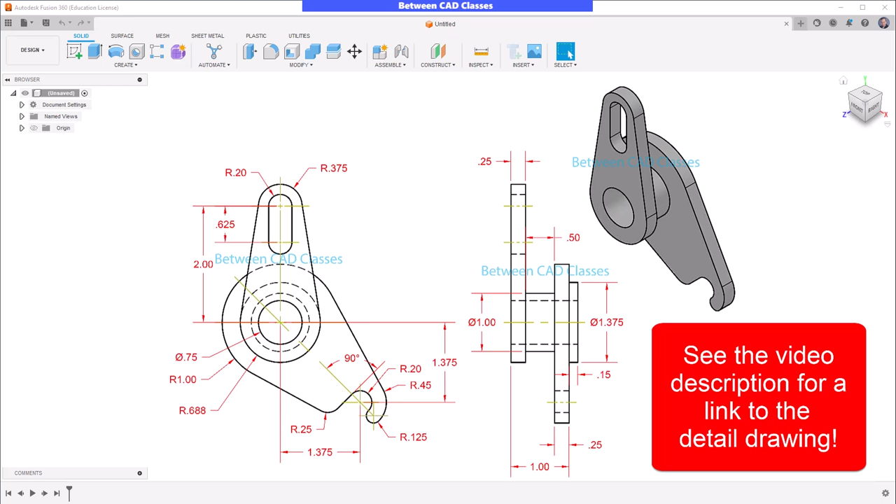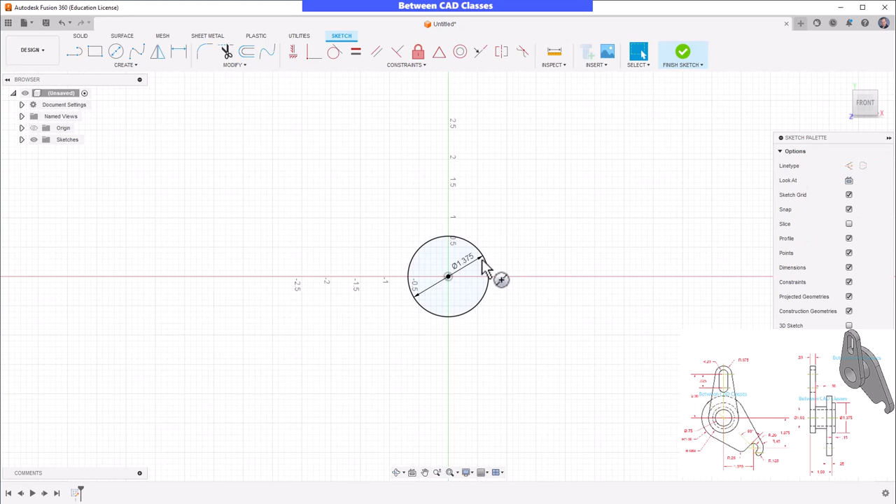To begin with then, we're going to start with the diameter of 1.375 extrusion that is going to be extruded 0.15. So here in Fusion 360, I'll begin with a new sketch, and then I'm going to sketch on the front plane here. I'm going to place everything around the origin, so I'll begin with a center diameter circle, snap to the center point there, and then put in the diameter of 1.375 and enter. I'll finish the sketch, and then extrude that the distance of 0.15, and enter.

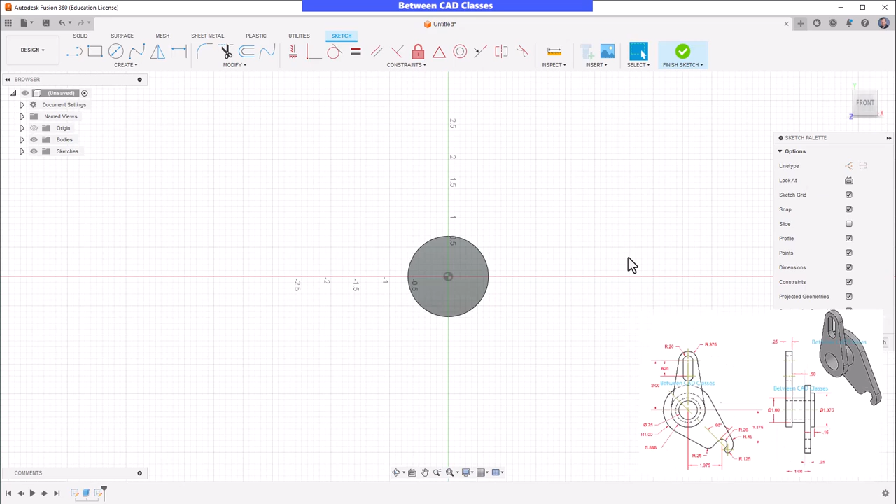Next I'll create the next feature, and it will be on this front surface here. So I'll begin with my create sketch and I'll click on that surface. Let's take a closer look at the detailed drawing here. I can see that I'm going to have a radius of 1 circle around the same center, and then I will have a radius of 0.45 circle that is at 1.375 down from the other, and 1.375 to the right as well. So once I draw those two circles, then I can connect them with some tangent lines. Then I can tackle the cutout. So let's take a look at drawing those features first.

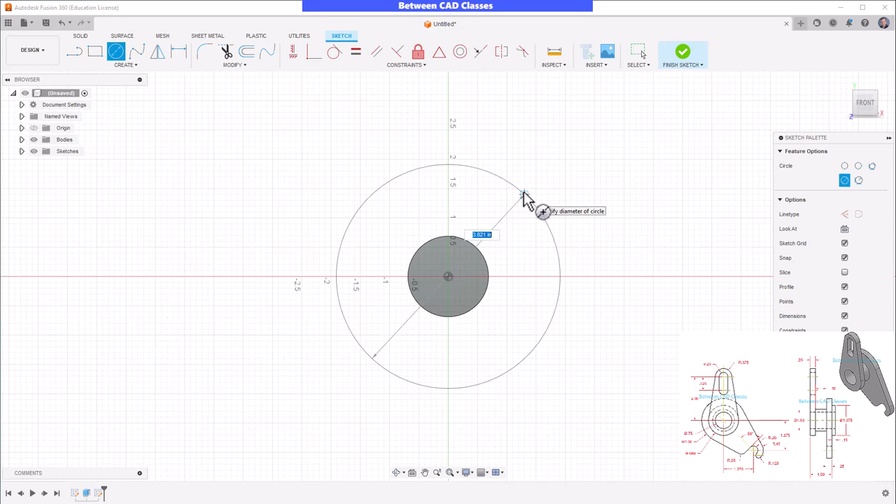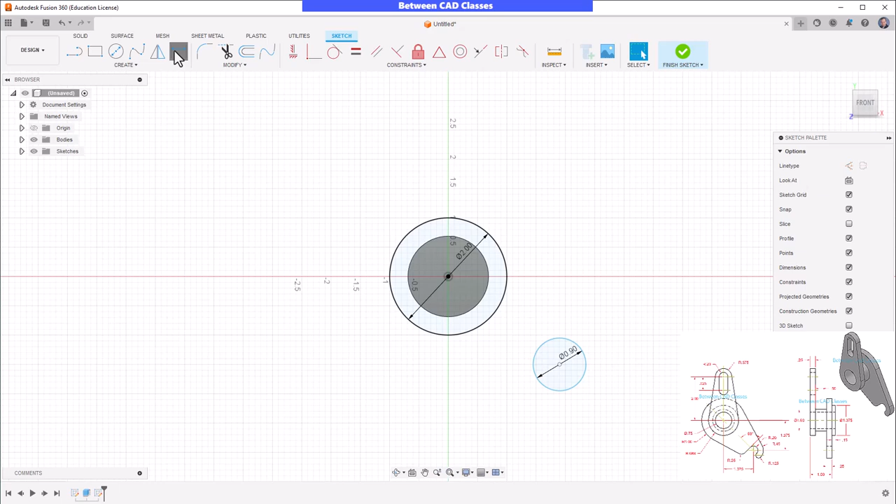I'll start with the center diameter circle, snap to the same origin here. We're told it's a radius of 1, so that'll be a diameter of 2. Then I will have my second circle, and I'm just going to arbitrarily place it for now out here to the bottom right. And then it's going to have a diameter of 0.9, since we're given the radius of 0.45. Then I can go ahead and add in some dimensions to place this. So I'll dimension from the center of each of these circles, and then I'll click to place a horizontal dimension of 1.375. And then I'll do the same thing vertically. So another dimension from center to center, click to place it, and 1.375 again.

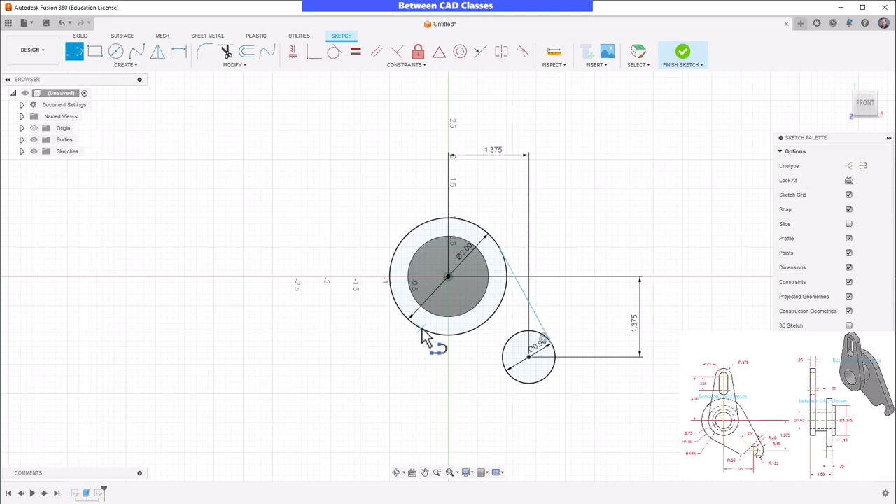Now that those are located properly, I'll go ahead and draw some tangent lines. So I'll start my line tool, and I'm just going to arbitrarily pick the first point, and then I'm going to look for the tangent constraint when I get to the second circle. And then I'll come back and add my tangent constraint on the other one. So I'll do the same sort of thing here. Pick a point, and then look for my tangent constraint there. I can still see my geometry is blue, it's under constrained, so I'm going to come back and add some tangent constraints between the line and the circle there, and the line and the circle there.

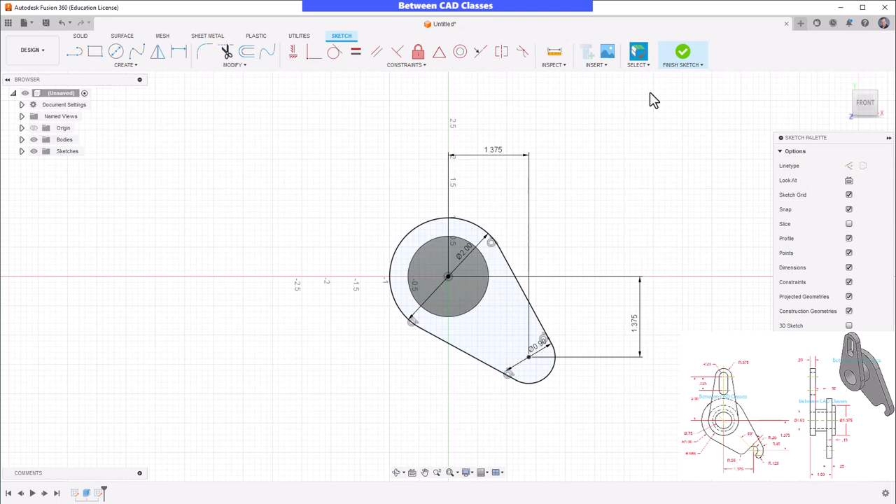Now at this point, I can leave it as it is and extrude it as 3 separate features, or I can trim them. I'll go ahead and trim the inside of these circles. And I get a little message that some constraints were removed, but we can see that it is still fully constrained and should be okay. I'm going to go ahead and finish the sketch, and then I will extrude this the depth of 0.25. So I'll select my shapes here, both of them in this case, 0.25, and enter. Now the part does have a hole cutting through each of these. I'm not going to add them to the individual sketches. I'm going to come back and add one hole at the very end.

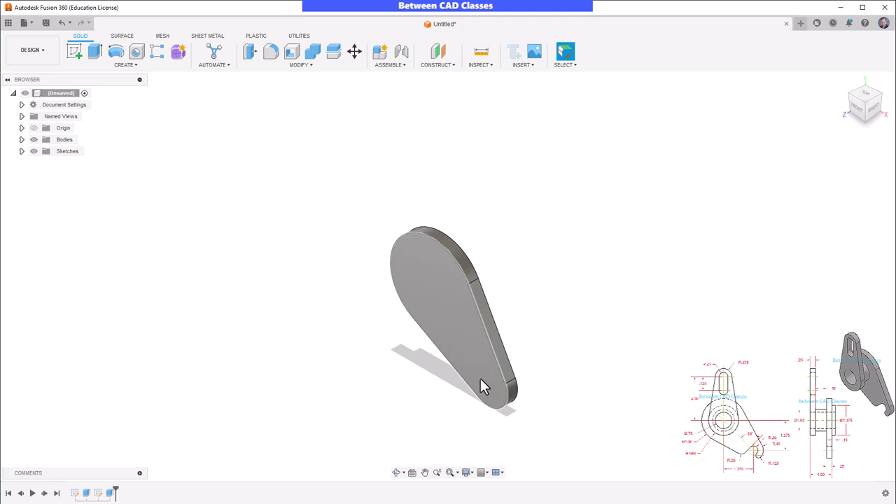Next I want to tackle this little cutout. Now I could have done that as part of the original sketch, but I'm going to go ahead and do it as its own feature. That would give me some flexibility if, for example, I wanted to get rid of that cutout later. So as we look at the detail drawing here, there's a lot of detail here. We've got a radius 0.2 arc at that center point of the other arc, and then we have another one with a radius of 0.125 along that same vector from the center. And we can see we have the radius 0.25 round as well.

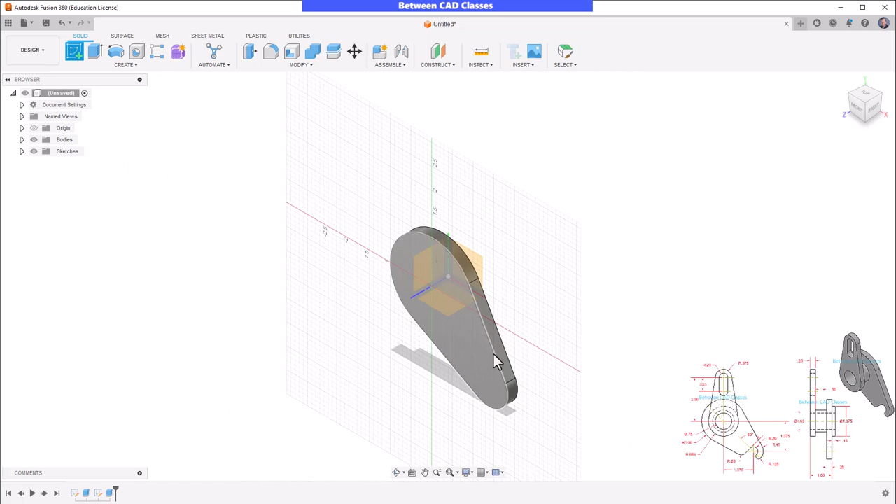So back in Fusion, I'm going to go ahead and sketch on the front of this shape. I'm going to start by creating a concentric circle here. So I'll snap to the center point and give it a diameter of 0.4, since we were told it has a radius of 0.2.

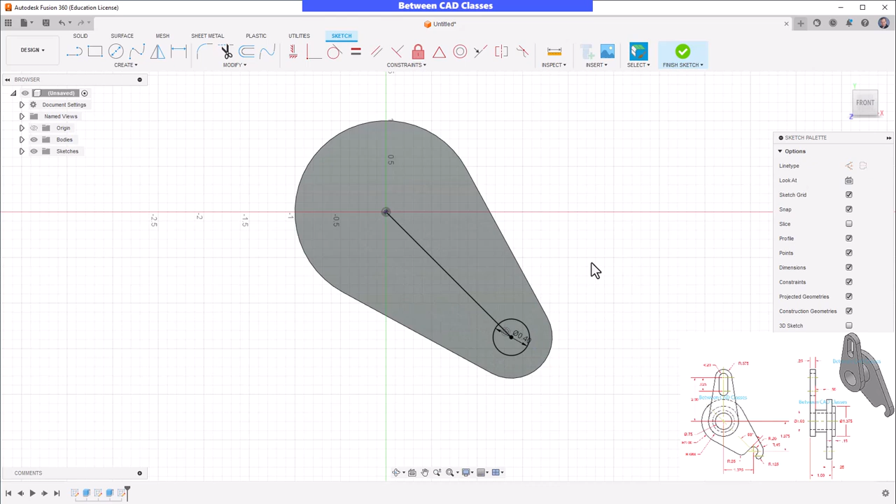Next I'm going to create a construction line between the centers of these arcs. So I'll just simply draw a line from center to center here, and then I'll escape out of that. Then I will select the line, right click, and convert it into a construction line.

Next I'm going to extend this construction line. So I'm going to click the modify drop down and choose extend. I'm extending this because this will allow me to locate the next circular shape over here. So I'll extend the line. Looks like I get a message that some constraints were removed. I'll investigate that more in just a moment. I'll go ahead and extend that one more time here, and then I'll press escape to get out of that.

I'm going to click and drag on this line, and I can see that it lost its coincident constraint to that center point. So I'm going to come back and add that back in. So coincident, center point, and line, and now we can see that's back to where it needs to go.

Next, I'm going to draw a circle in here and then make it tangent to this inside circle and the outside arc. So I'll select the center diameter circle. I'm going to snap somewhere on this construction line here, and then I'll just draw it of any size. Then I will escape out of that and come back with my tangent constraints. Make a tangent between the circle and the circle that I just drew, the circle I just drew, and this outside shape. And we can now see that it's fully constrained.

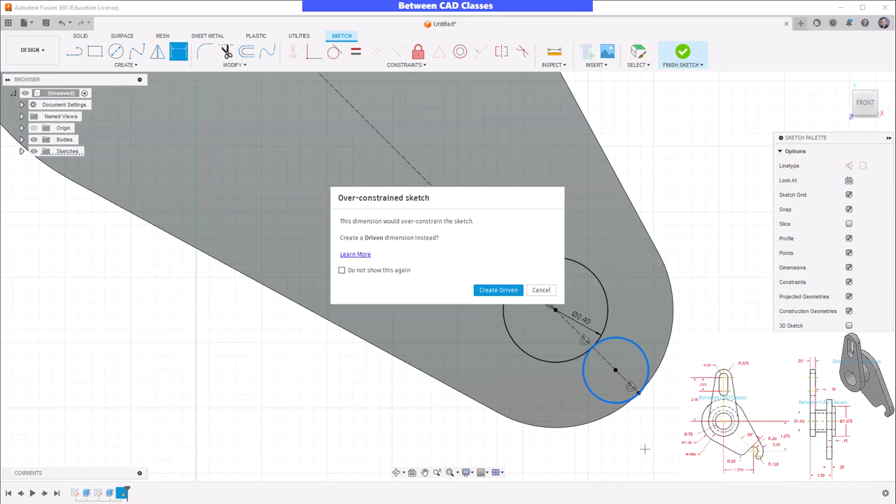We were told it has a radius of 0.125. We didn't have to add that dimension in. But if I wanted to double check it, I can add in a dimension here. And I can right click and switch it to radius and click to place it. That would over constrain my drawing, but I can go ahead and create a driven dimension just so that I can see a reporting value and feel comfortable knowing that it's the correct size.

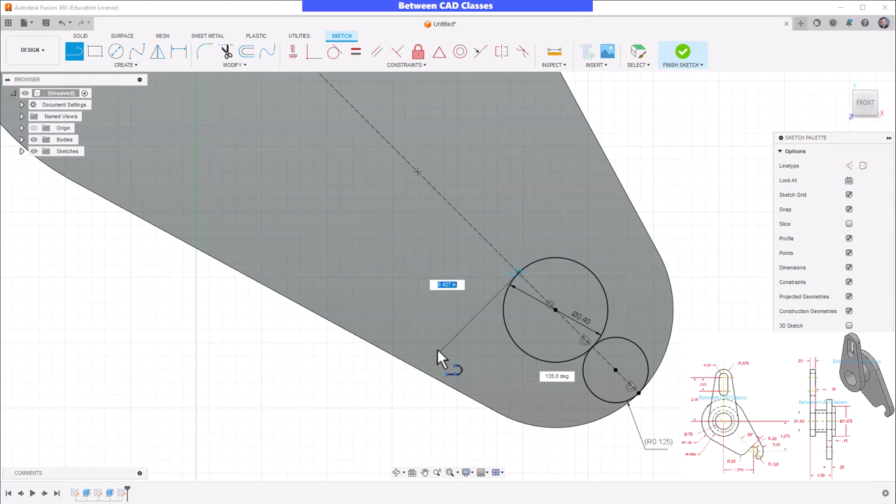Next, I'm going to draw the other line over here for the cutout, so I'll choose my line command. I'll snap to the intersection here, and then I will snap to perpendicular/tangent of that circle, and then I'll just draw it to the edge here. I now have everything I need for my cutout. I could go ahead and leave it just as it is and cut out these two shapes. In fact, that's what I'm going to do. I'm afraid if I do some trimming, I might lose some constraints, so I think it'll be easier to just accept it as it is.

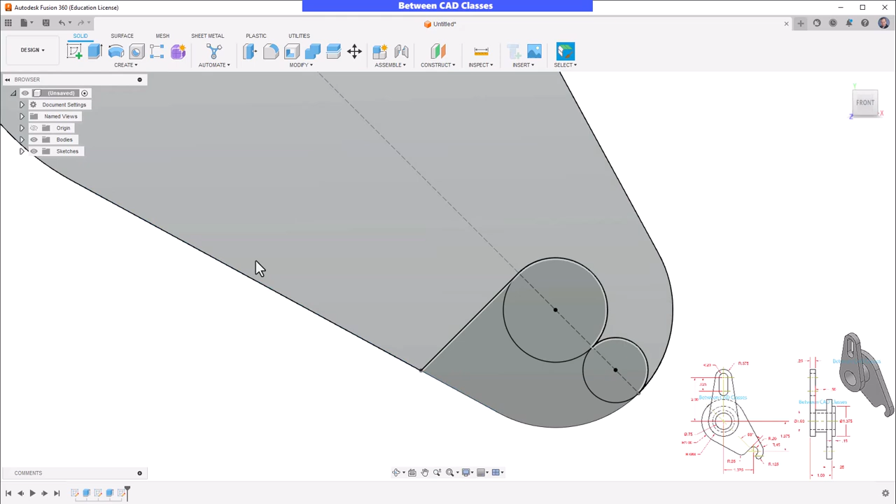So I'll finish my sketch. I will choose my extrude. I'll pick the big circle here, and then the shape here. Then I can drag it into the part, and we can see it's going to be a cut. So instead of distance, I'm going to go through all, and then click OK. Then finally I can add a fillet with a radius of 0.25 here. So I'll use my fillet command, I'll select the edge, 0.25, and enter.

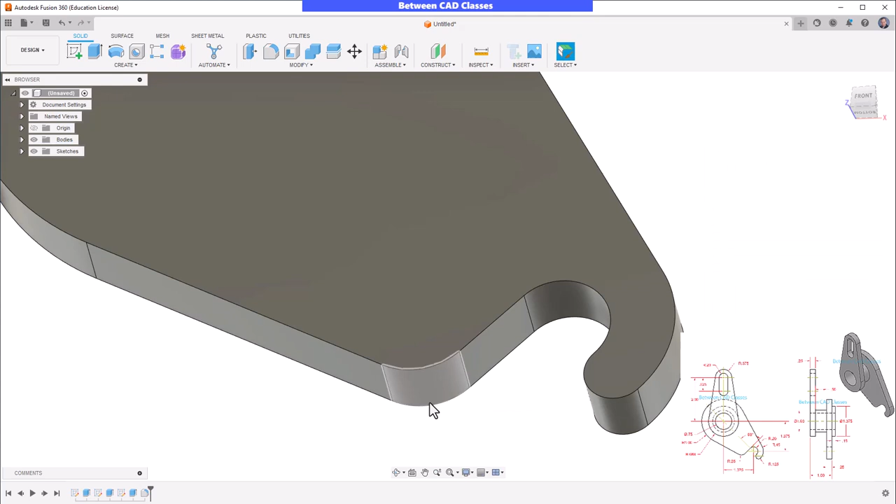So once again, that was one way I could have done this. I could have put it all in one sketch, but one of the reasons why I like this is it gives me some more flexibility. If I want to come in and get rid of those objects, I can right click and delete them and they are gone, as opposed to having to go in and edit the original sketch.

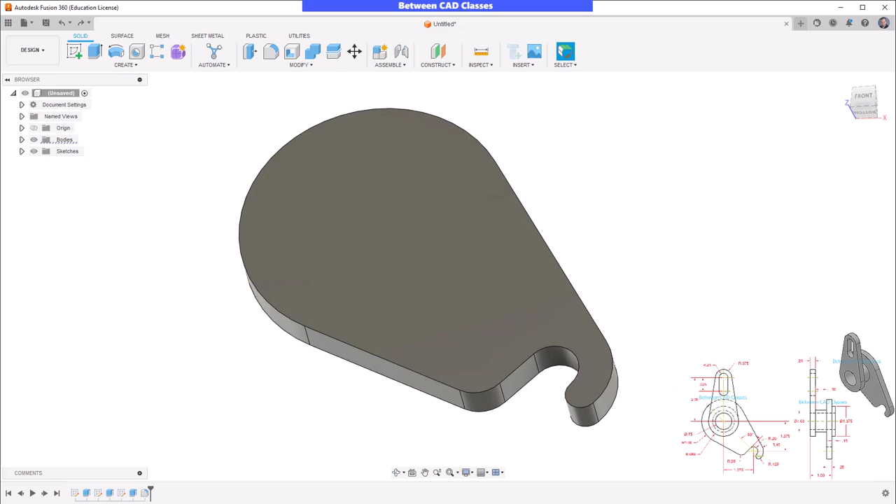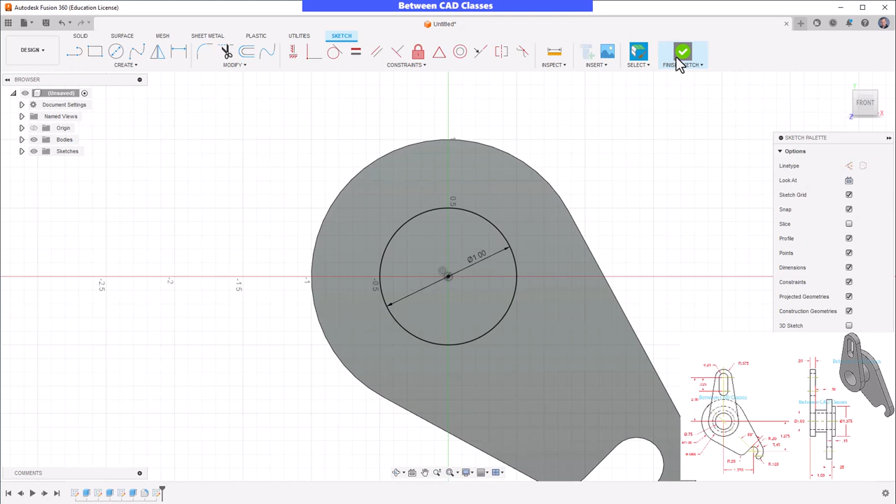Let's take a look at the print again, and next we have a diameter 1-inch circle that is going to be extruded up 0.5. I'll do another sketch on the top of this plane, and then I'll draw in my circle with a diameter of 1, finish that, and then extrude it 0.5.

Then one last shape is going to be put right on top of this circle, so I'll go ahead and sketch on it. As we take a look at our print again, we can see that the main shape is going to have a radius of 0.688 on the bottom, and then it's going to come up 2 inches, and then we'll have a radius of 0.375 up top. So I'm going to begin by creating that, and then I'll come back in and add the slotted cutout later.

So I'll go ahead and draw a circle at this same origin point. For the diameter value, I don't have that offhand. I have the radius value. I could do the math myself, but let's have Fusion do the math for us. I'm going to put in 0.688 times 2 and enter that in. So that's always nice to have Fusion do the math for you and make sure that you don't make a mistake in transferring what you might have calculated.

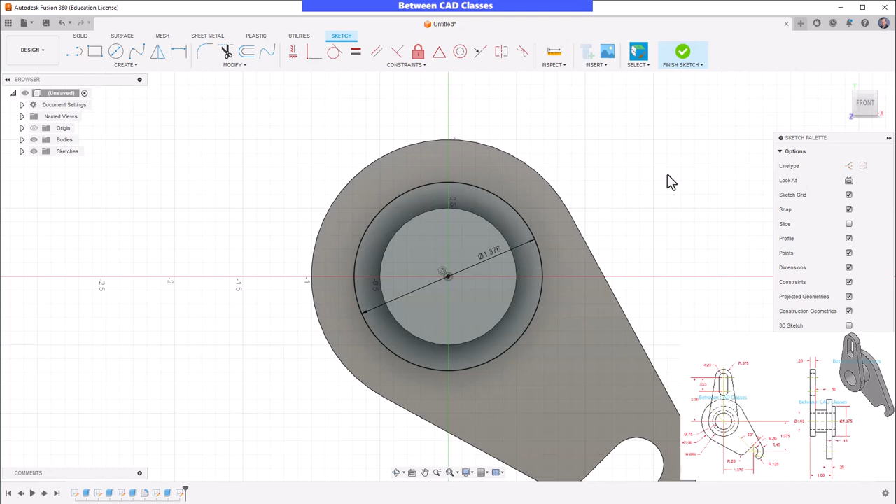Then I am going to add another circle directly up above that one, this one with a radius of 0.375. Again, I could put in the diameter as 0.375 times 2, and that will calculate that to be 3/4 of an inch for me. I'm going to escape out of that, do some dragging, and I can see I'm going to need a couple of constraints here. I need a vertical constraint between it and the center point down there. So I'll choose my vertical constraint and select the 2 centers there. Next, I'll add in my dimension of 2 inches between those centers. So now the circle is fully constrained.

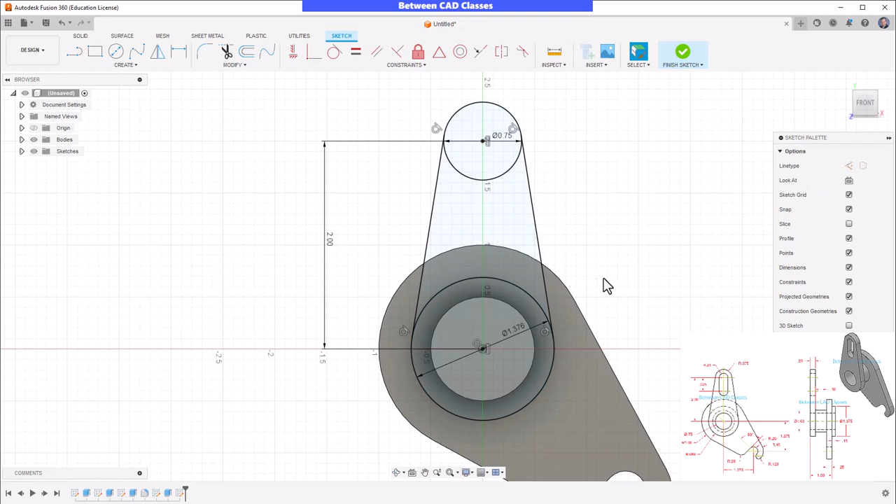I can go ahead and come in and add in my lines. Again, the first one is not going to be tangent, but I can draw a tangent to the second shape. Same thing on the next one. Then I can come back and add in my tangent constraints. I could go ahead and trim these shapes out. I did that on the earlier one. This time I'm just going to leave them and just have 3 profiles to extrude. Once again, sometimes when you trim, it loses some constraints, so I'm going to leave it as is. I'll finish and extrude all 3 shapes here, actually 4 when we include that projected shape. And the depth of this one is 0.25.

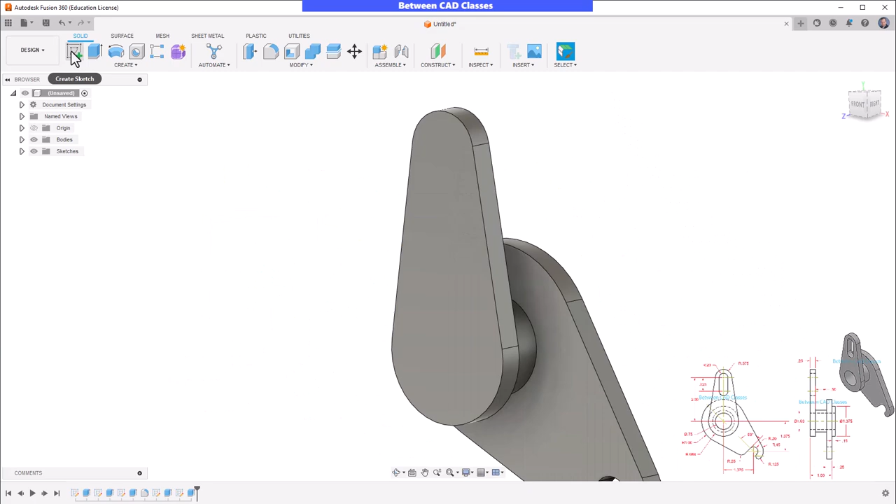So next I'm ready for my slotted shape. So I'm going to consult my print once again, and I can see that these arcs have a radius of 0.2 and they are 0.625 apart. And of course they share the same center as that top arc. So back here in Fusion, I'll go ahead and sketch on that front face. To create the slotted shape, I could draw some circles and tangent lines and trim them, but we actually have a specific tool for that.

I'll go to Create, Slot, Center to Center Slot. I'll snap to the first center point here, and then I'll bring it down 0.625, and then I'll press Enter. Then I can specify the width of the slot. We were given the radius of 0.2, so that would give us a total width of 0.4 here. So I'll put in 0.4 and Enter, and there we have our slotted shape. It looks like while I typed in 0.625 for the distance, it didn't actually put a constraint on there. You can see I'm able to actually move this arc. So I'm going to come back in with my dimension tool, and then I will just simply dimension the line here and set it to 0.625. Now it's fully constrained. I'll go ahead and finish.

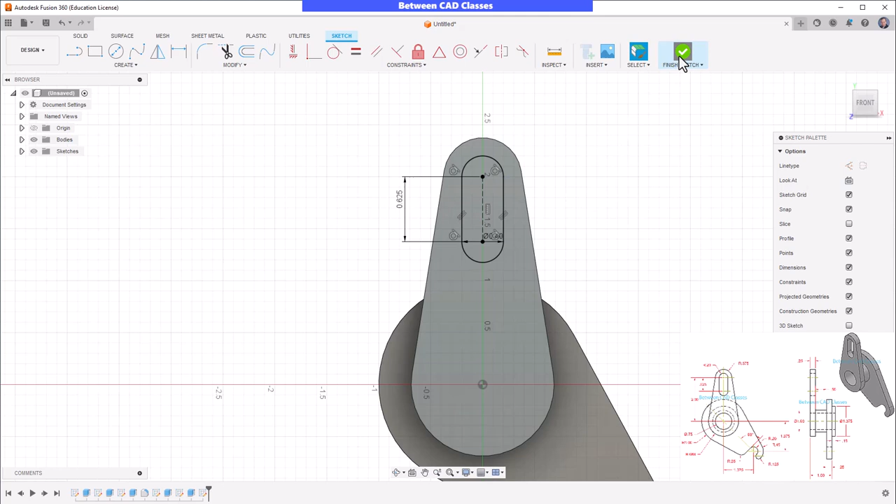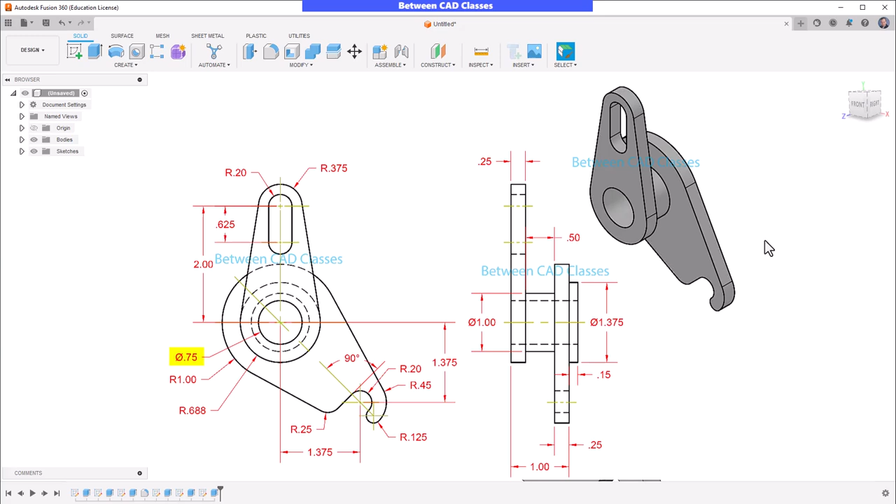I'm going to extrude that as a cut, so I'll drag it into the part and change it to through all. Then I can click OK. So finally I can add the circular hole in here. So I look at the print one last time. We can see that it has a diameter of 0.75, and we can see by the hidden lines in the side view that it cuts all the way through.

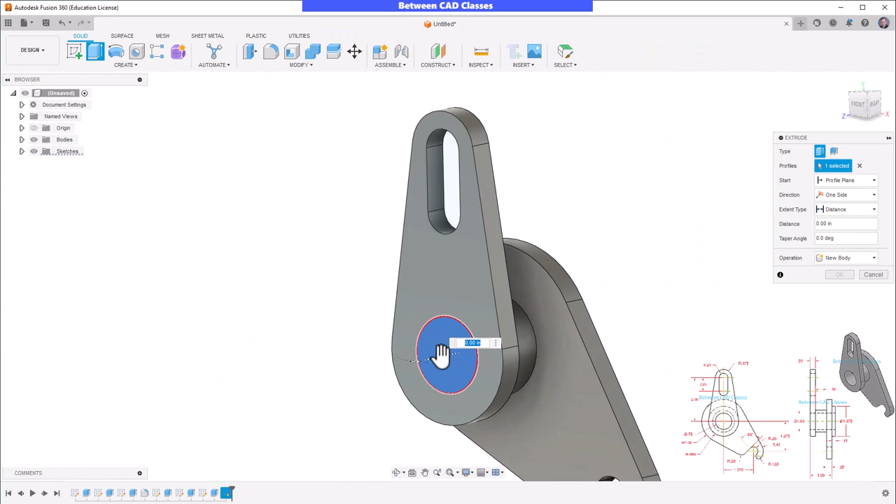So I will go ahead and sketch on that front surface. Draw a circle at that origin point there with a diameter of 0.75. Then I'll finish my sketch, extrude it, and again I'll just drag it into the part. It turns into a cut, and I'll change it to through all. And there we have our final shape. Again, a little extrusion on the back. I think the most difficult part was creating this little cutout. But that completes this tutorial.